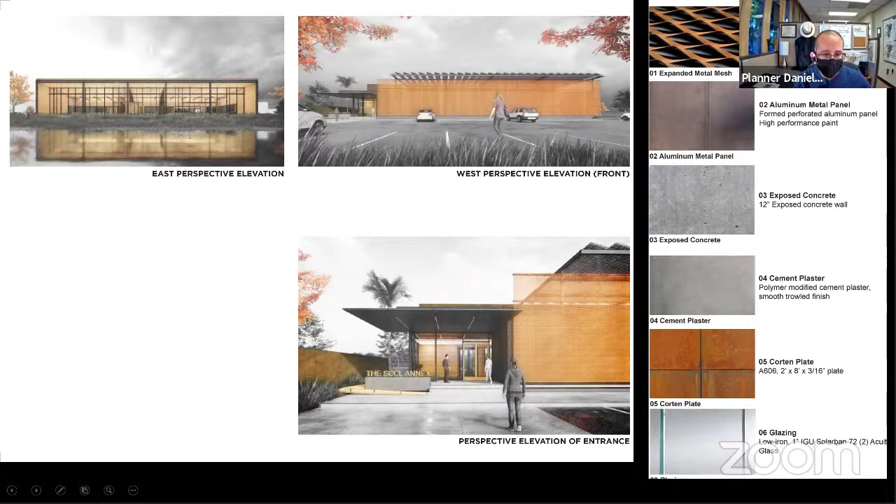The site has several trees, three of which are considered protected. The application requests removal of 2 of those trees due to the proximity of the building. The application also proposes relocating an existing queen palm tree from one side of the site to another.

Also, there is a request for a reduction in perimeter landscaping. Normally the code requires 5 feet of landscaping all the way around, but due to the need to provide a walkway to the adjacent property and adequate emergency vehicle access, the application requests a reduction in landscaping along those edges. However, in total, the site would still exceed the 10% minimum landscaping requirement, not taking into account the access way, simply because that panhandle cannot be landscaped. So staff felt it was most appropriate to not include it within the 10% calculation.

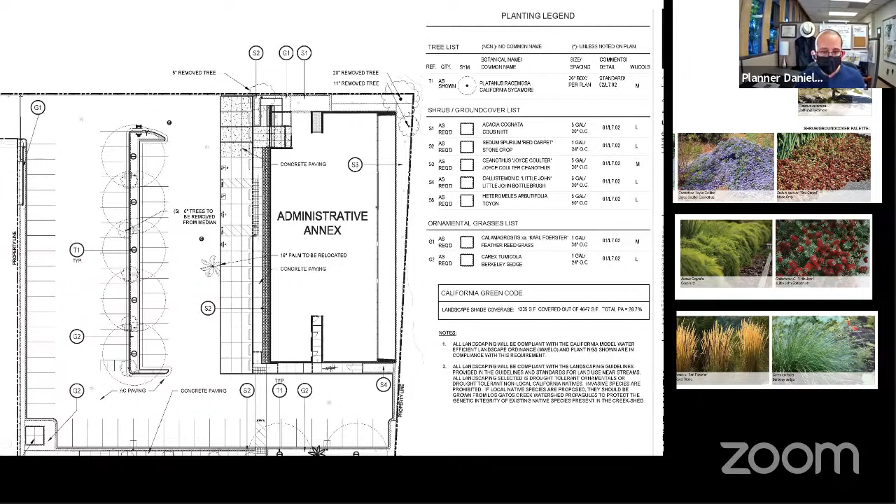Lastly, the application also includes a request for a utility variance. Technically, this application requires that existing utility poles and overhead utility lines be replaced with new underground service, going from this pole to this pole, with a likely downstream ramification in the other direction. Because the frontage is so limited to simply the one driveway, the applicants are requesting a variance to leave the existing utilities as they are today. Otherwise, that type of improvement could be seen as an encumbrance on the overall project. That is it for my presentation.

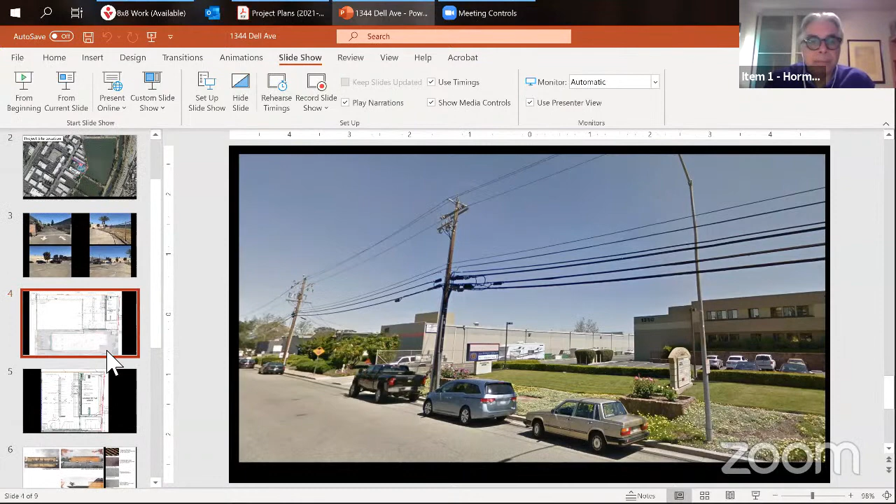What was the reason for the setback being so close to the perimeter? Why couldn't it be moved back a couple more feet so it's not an issue? It was actually more than a couple of feet. If you can go back to that site plan, that triangular shape essentially is the area where we are in encroachment. Moving that out of the encroachment would have essentially encroached on the parking on the other side, and due to the very limited width we have there, we just didn't have the room to push the building. We couldn't reduce the square footage.

We already reduced it from the initial intent of 13,000 square feet, exactly for these reasons—we couldn't park it—so we reduced it to 8,000. And within that, you still have that triangular pink area, which is the encroachment area. Although, like Daniel said, it is on a deck essentially, so the building is not encroaching into it, but it's a deck that is covered from the top. That's the extent of the encroachment. That's the reason—we just didn't have the room.

Correct, and you can see that it's quite tight too. You have the two drive aisles, and these parking stalls actually overhang into the landscaping areas. So the challenge here is that in order to comply with the setback requirement, the project would effectively have to lose the deck entirely, losing that outdoor amenity for the employees. And just to add on to that, the deck would be one thing, but the roof covering the deck is actually shading all that glass. So based on the orientation, it would be essentially too much sun in the building—they'd have to pay to air condition it forever. So it's a sustainability measure as well.

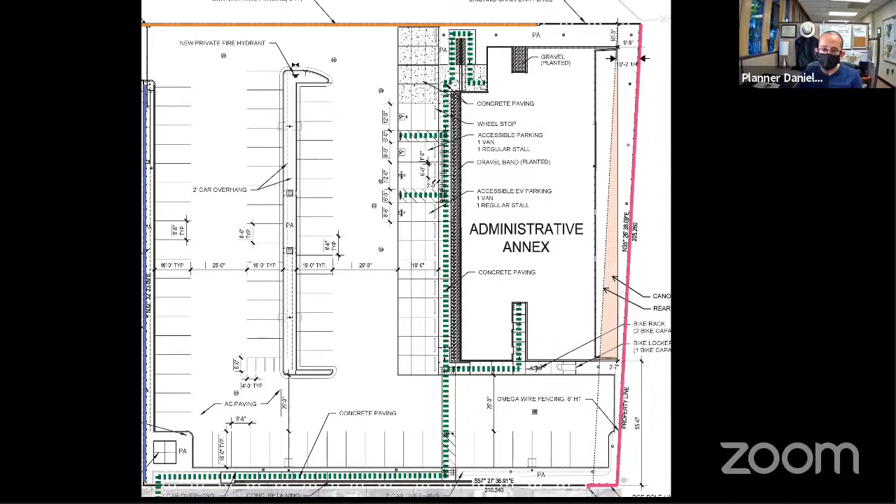Now that everybody's looked at all the documentation, it really only means 47, which is fine. So we have 7 spots to spare, but our hope is not to have a trash enclosure, only because of the aesthetics to it. It's not viewed from the street, but we'd like to keep that building. It's a gorgeous building, and technically the two properties are really one, because you can't sell one without the other because of the parking restrictions. So that's kind of what we were anticipating, and what we submitted for.

Also, we're not actually adding staff. We're just moving staff from the existing building to that building, and won't really be generating more trash. So if that becomes the conclusion of this, we have a couple of options we'd like to share, but we're hoping that we can proceed with one trash enclosure for both properties, although they're technically, like I said, just one property because of the parking.

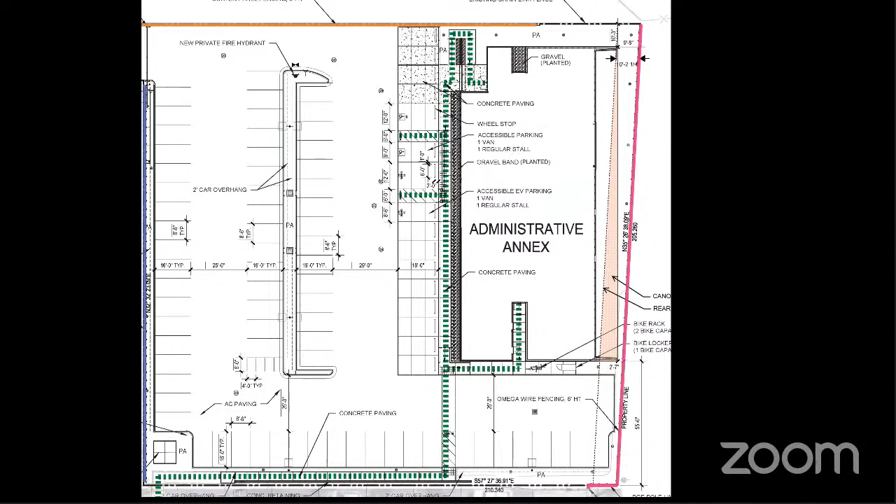Does that make sense? Yeah, I think I hear what you're saying. Is it possible to merge the parcels, since you own both and want to sort of administer them as one block of land? It is very possible to do that. It's a fairly straightforward process.

So I've got a bunch of questions and comments, but before I and Adam ask them, does the applicant want to present anything or talk to the proposal and plans first?

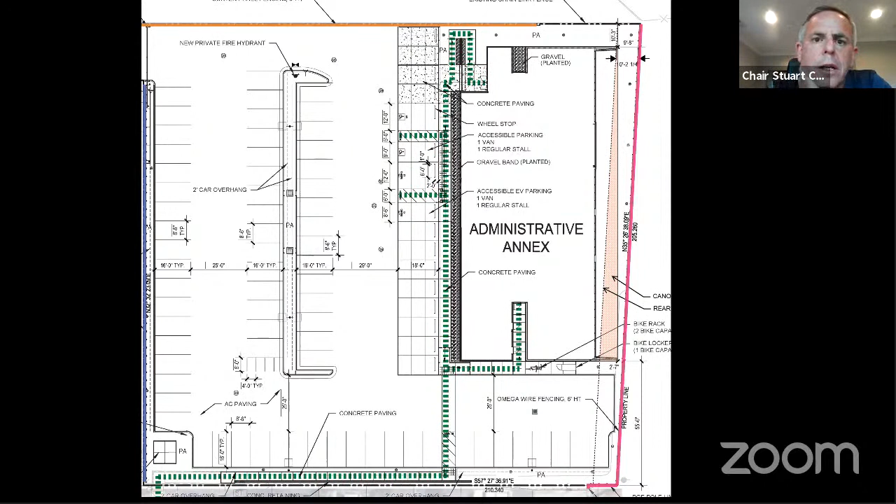Daniel did a great job of explaining everything. It's a small building. We can go a little bit into it if you'd like to hear more on the palette for the materials and the way that the building was planned in concept, based on the private and public part, starting from the street and transitioning to the park. We can explain more if you like, but if what Daniel presented sufficed, I don't think we have more to add to that.

No, I think the report was good. It was just if you really wanted to say something, which Daniel already explained well. Thank you. Adam, are you okay with that?

Well, actually, I did have a question about the... Excuse me. No, do not eat that.

I noticed that the side facing the creek trail is sort of this big open glass thing, which looks really, really cool. How much light does that put out at night?

Are you looking for actual lumens, or... Well, I mean, just in terms of... There were comments actually in the planning review as well, just considerations for not intruding on or polluting with light basically outside of the building.

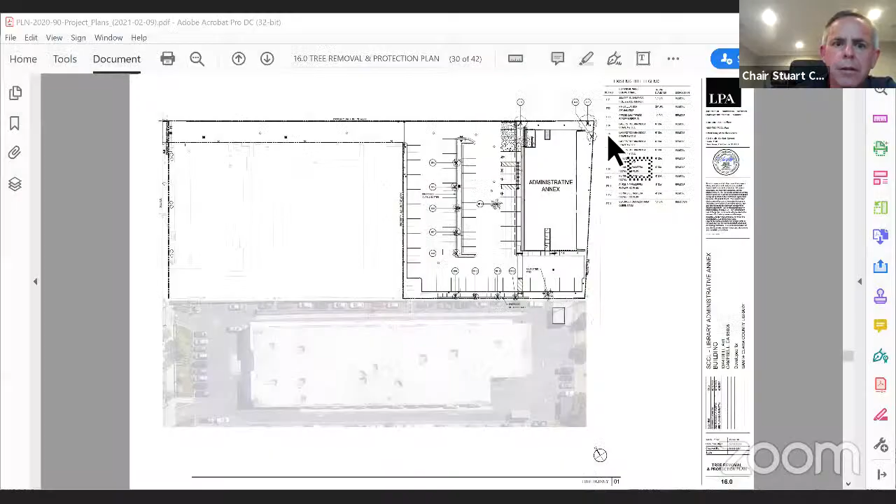Well, I guess there's two things. One is they have to be removed because of the construction and siting of the building, and the other is because you don't think they're good candidates for keeping. If it's the latter, I think it's sort of like... yeah, so we see these trees over here at the corner. See, that's not right, the building is not even encroaching on them. I think one of these is near a sanitation line that's proposed. Right, but I agree, neither tree seems particularly of a quality or worth keeping.

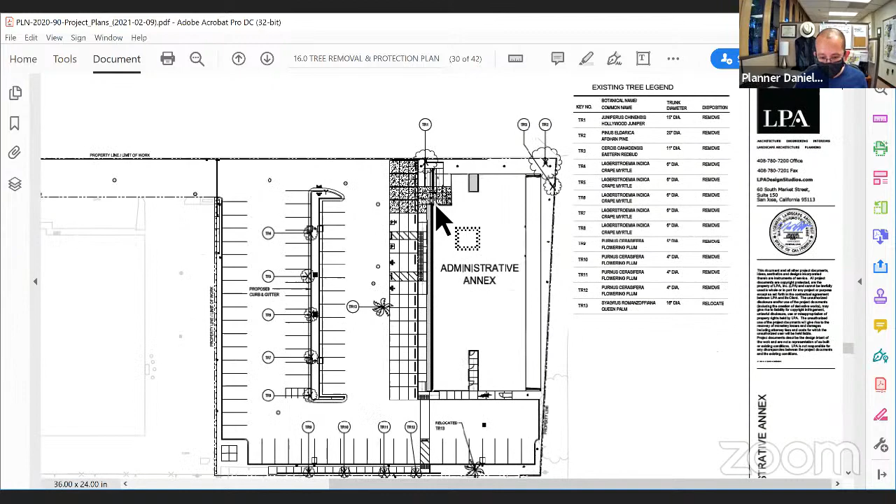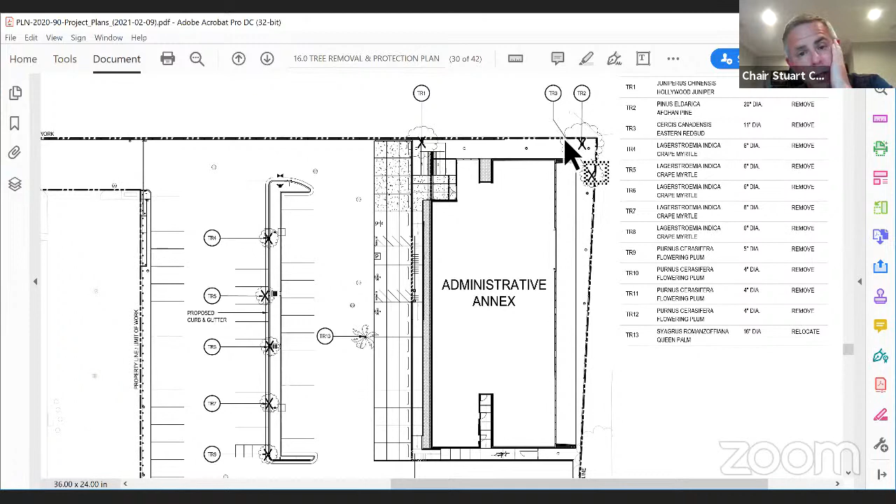But I guess if that's something the SARC would like the applicant to look further into, we could explore that question a little further. Yeah, it'd be good to get a picture of them or a bit more detail, because they may be... it looks like it doesn't interfere with the construction there, but they may just not be very good trees. I don't know, it'd be nice to understand that better. Where I'm going with this is we could have them replaced rather than just being removed. There will be new trees planted on the property within the center median for the parking lot.

I think I have a photo here of the trees. Give me a moment.

I hate to get rid of trees too, but it's just not a good tree to have in the area. It's got some issues with the roots already encroaching on the neighbor's property, and I'm not sure what that means to them. And the juniper, it's just, yeah, we could add trees that are a lot nicer than that, and don't create problems for us, because those two trees will create problems with any type of hardscape we put next to them. It's already evident if you look at the trees and what they're doing to the asphalt.